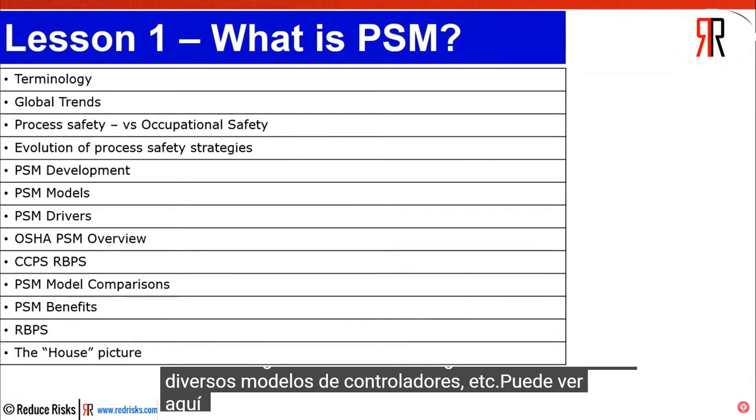In this section, we're going to look at PSM, with an introduction to what is PSM, how it has evolved, and how it all fits together with the various frameworks out there. When we look at what is PSM, there are a few things we've got to go through: some terminology, global trends, the development, the various models, drivers, etc. You can see here the list of things that we're going to go through in this presentation.

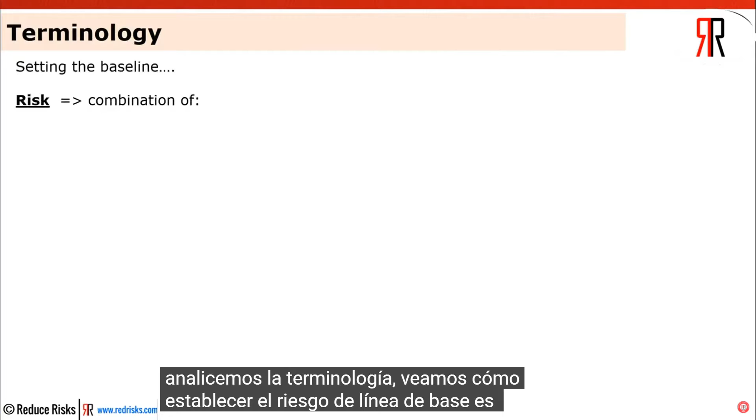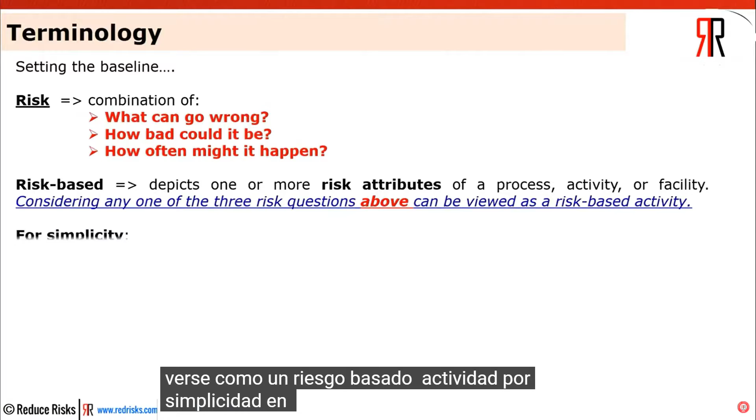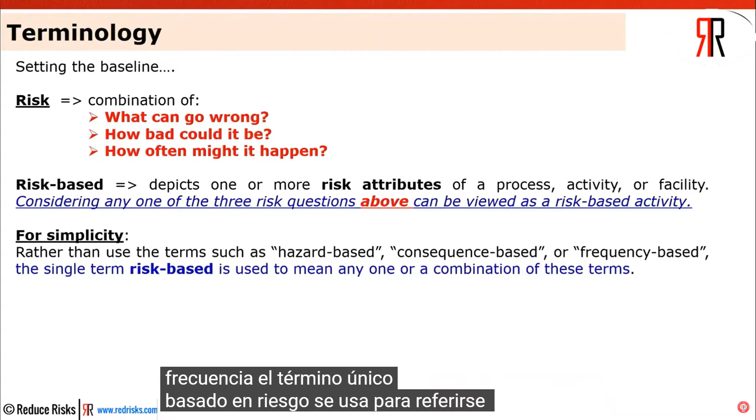When we look at terminology, let's look at setting the baseline. Risk is a combination of what can go wrong, how bad could it be, and how often might it happen. When we look at risk-based, it depicts one or more risk attributes of a process, activity, or facility. Considering any one of the three risk questions above can be viewed as a risk-based activity. For simplicity, rather than use a term such as hazard-based, consequence-based, or frequency-based, the single term risk-based is used to mean any one or a combination of these terms.

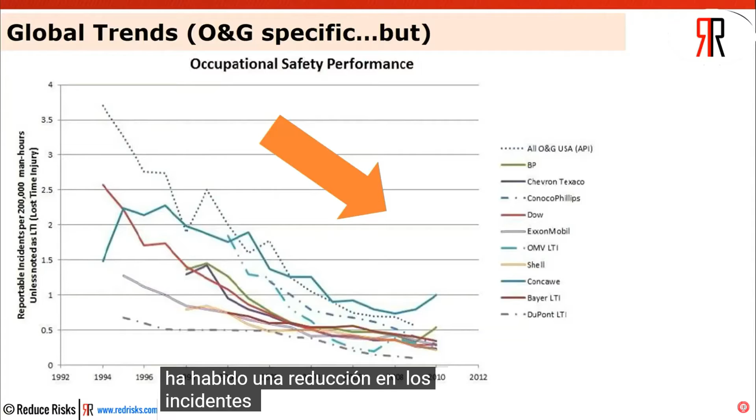Global trends, oil and gas specific, but generally you can say it's the same for other sectors. We know that in terms of occupational safety performance for various oil and gas companies, BP for example, which was my previous employer, we can see that over the years from 1992 to 2010, there has been a reduction in the reportable incidents per productivity or man-hours worked.

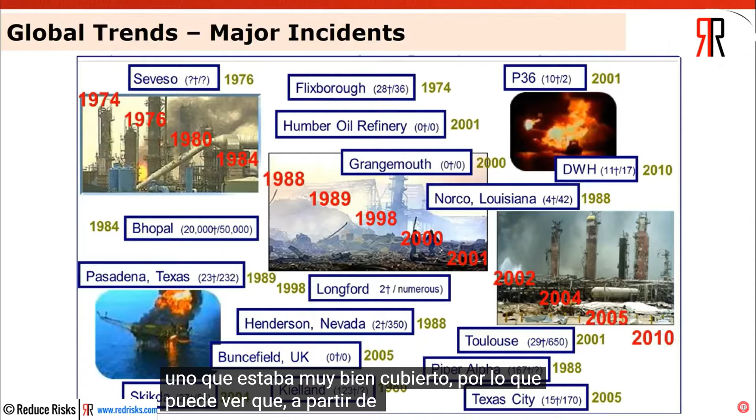Now, global trends in terms of major incidents, again looking at it from 1974 to 2010, some of these are very, very familiar. They had some very high profile exposure, especially in the news. For example, Texas refinery and Flixborough was one that was very well covered. So you can see that from a global trends, we've got incidents that have happened for many, many years.

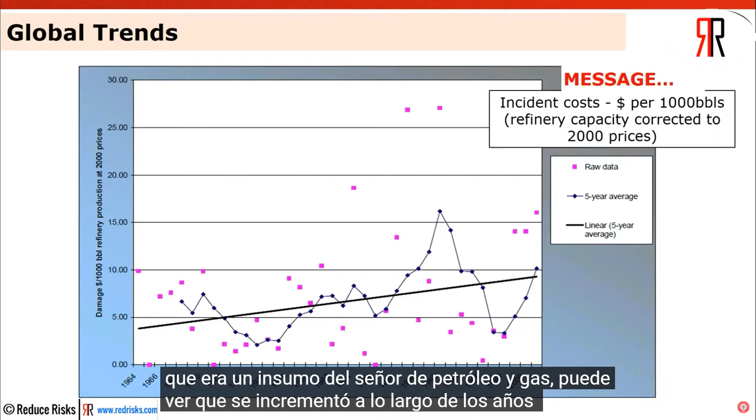Now, not to dwell too long on this particular slide, but as you can see in terms of global trends, the damage in terms of dollars per 1,000 barrels refinery, and I said this was an oil and gas input, you can see it has increased over the years from 1964 to 2000. The message there is it's getting costly.

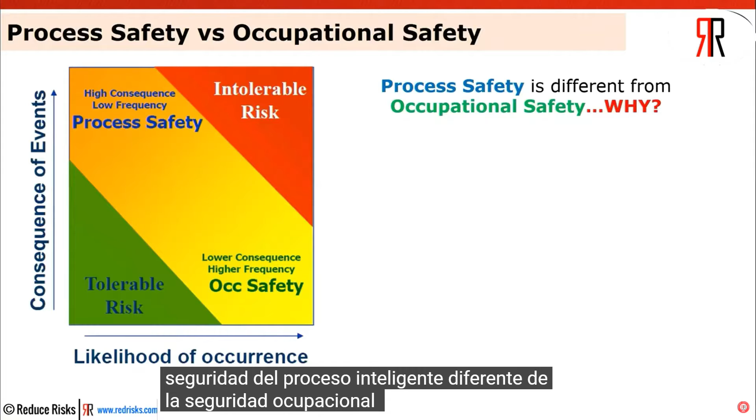So process safety versus occupational safety. What exactly is it? Why is process safety different from occupational safety? Well, process safety is not normal. Most people, not all, lack specific experience, and please don't toast me for this, that's just a general opinion. More robust analyses are required to identify the hazards, being something that can cause harm. And unacceptable consequences need more reliable controls.

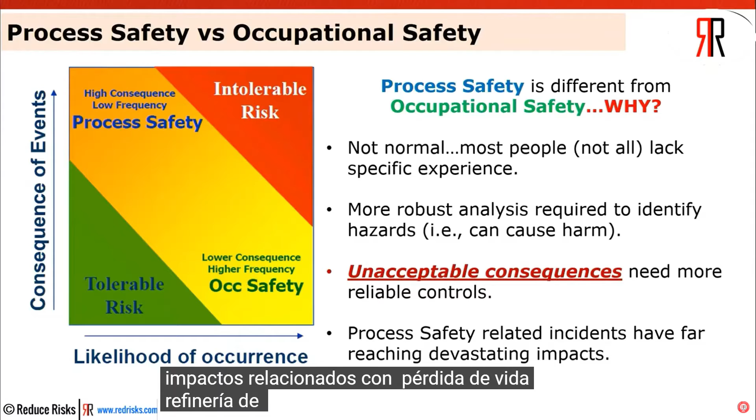But the most important message here is that process safety related incidents have far-reaching, devastating impacts. In the previous slide you saw some of the impacts relative to loss of life, Texas City refinery, Flixborough, etc. They can be significantly damaging to an organization.

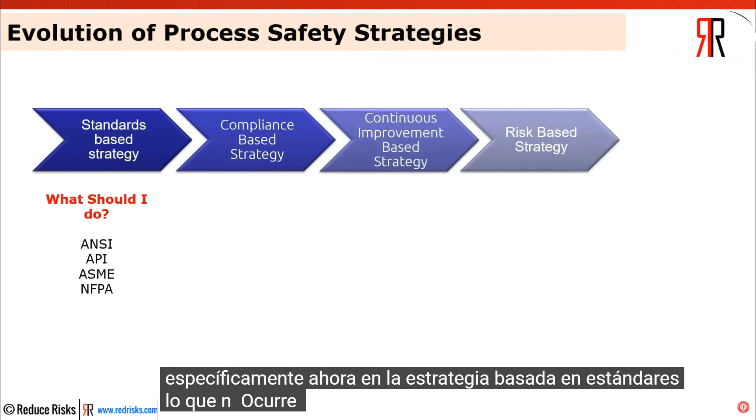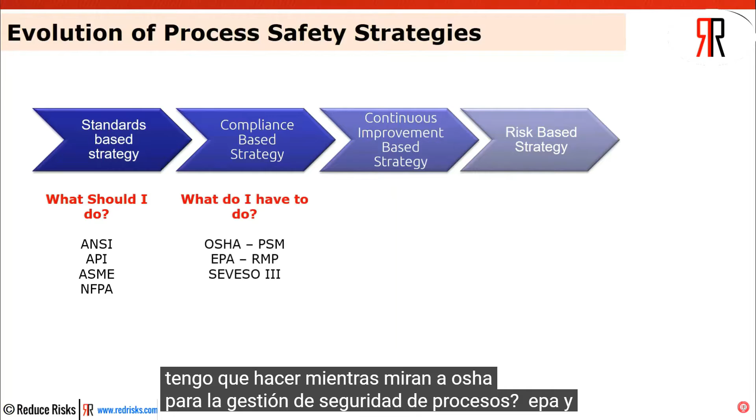Let's look at the evolution of process safety strategies. You can see the slides here go in terms of standard-based strategy, compliance, continuous improvement, and risk-based strategy, which is what we're looking at specifically. Now, in the standards-based strategy, what normally happens and what should I do? You look at ANSI, API, ASME, NFPA, etc. Apologies for the acronyms, but I'm sure most of you are familiar with that. In compliance-based strategy, what do I have to do? Well, you look at OSHA for process safety management, EPA, Seveso III, etc. These are very regulatory driven.

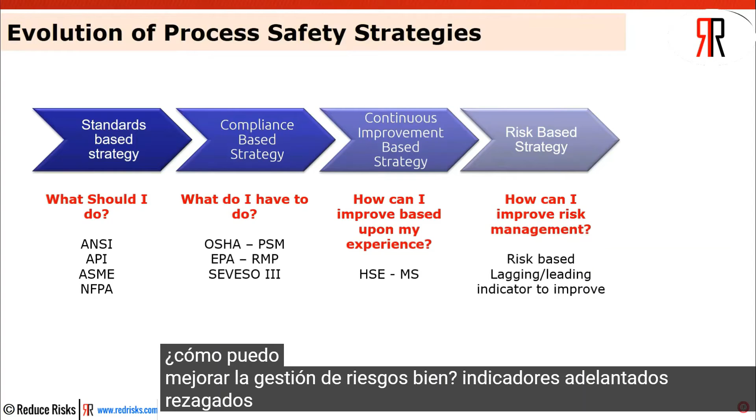Continuous improvement based strategy is how can I improve based upon my experience. Again, many of you will be familiar with the management systems associated with health, safety and environment, specifically OHSAS 18001, ISO 14001, etc. And risk-based strategy: how can I improve risk management? Well, risk-based, lagging, leading indicators to improve.

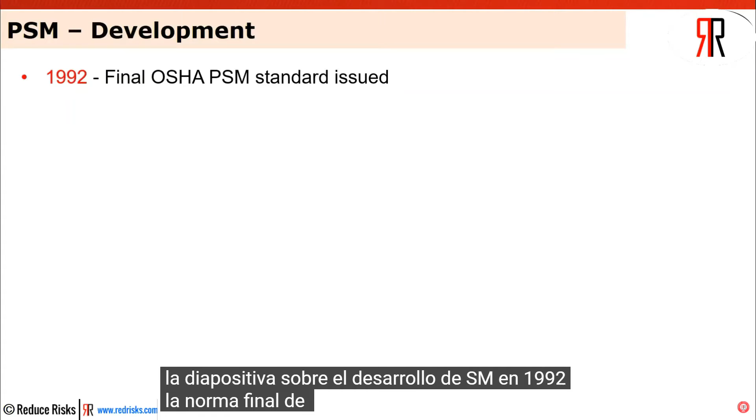Now, a slide on PSM development. In 1992, the final OSHA PSM standard was issued. In 1989, CCPS published their original PSM elements, followed by, in 2007, CCPS publishing the guidelines for risk-based process safety.

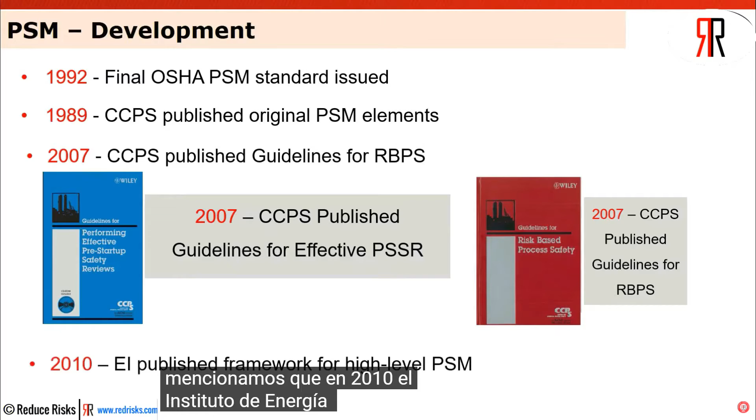And there are two specific documents, the 2007 CCPS published guidelines for effective pre-startup safety reviews and CCPS published guidelines for risk-based process safety. Let's not worry too much about the documents here. We'll be covering all of these and the various elements bit by bit, and also, more importantly, looking at the various components in it, metrics, etc. We must also mention that in 2010, the Energy Institute published the framework for high-level process safety management.

Let's now look at PSM models. We mentioned OSHA and we mentioned CCPS.

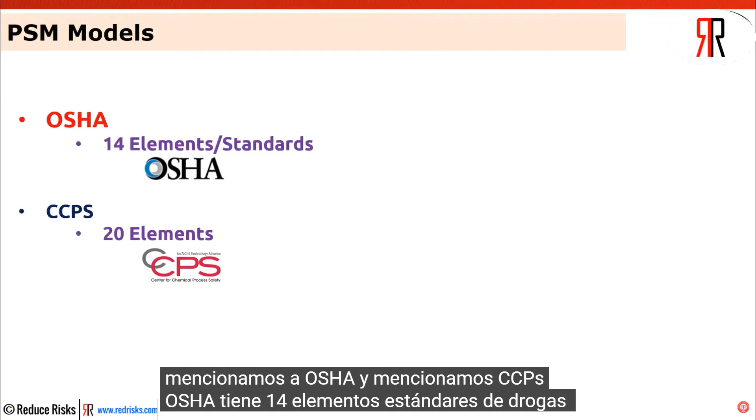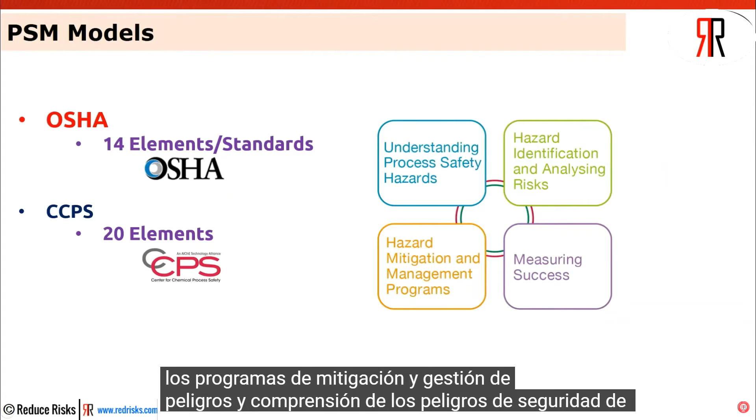OSHA has 14 elements in its standards, and the CCPS risk-based process safety has 20 elements. Fundamentally, they follow this principle of hazard identification, analyzing risks, measuring success, mitigation and management programs on hazards, and understanding process safety hazards. Now, let's look at PSM drivers.

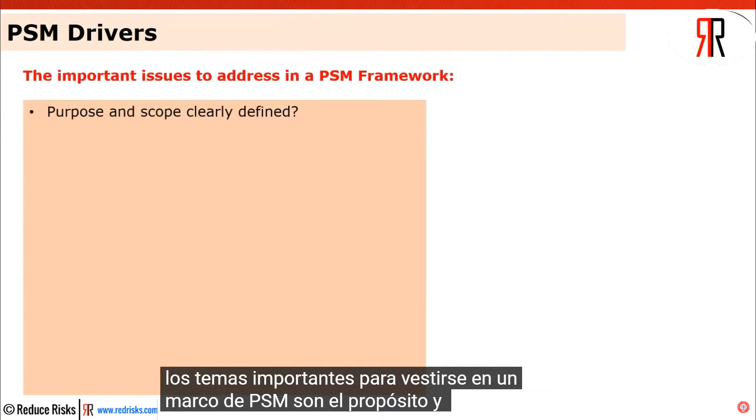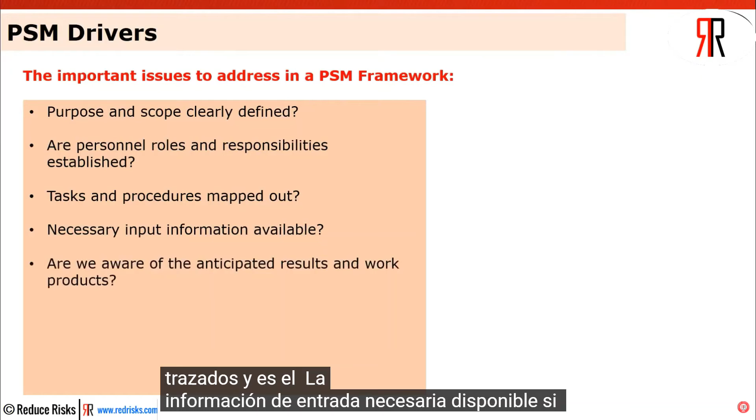The important issues to address in a PSM framework are the purpose and scope. Is it clearly defined? Are personnel roles and responsibilities established? What about tasks and procedures? Are they mapped out? And is the necessary input information available? Are we aware of the anticipated results and work products? Do we know what we're getting into here? And do personnel have appropriate qualifications and training to follow through on the PSM aspirations and framework?

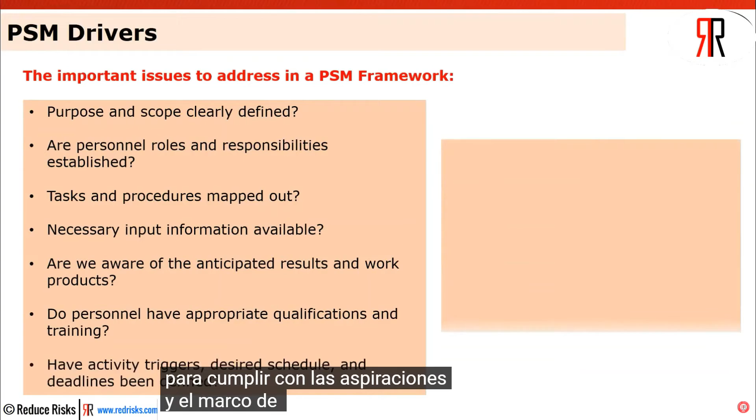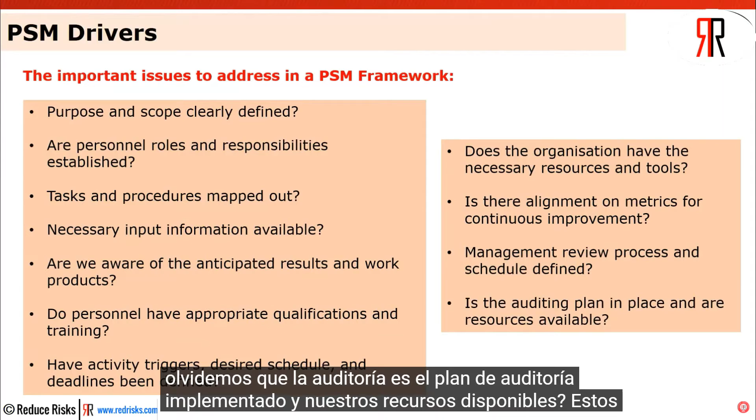Now, does the organization also have the necessary resources and tools? Has there been alignment on metrics for continuous improvement? And what about management review? Is there a process and a schedule defined? And finally, let's not forget auditing. Is the auditing plan in place and are resources available? These are just examples. I'm sure there are more, but these are the main examples for the important issues to address in a PSM framework. What about the OSHA PSM model?

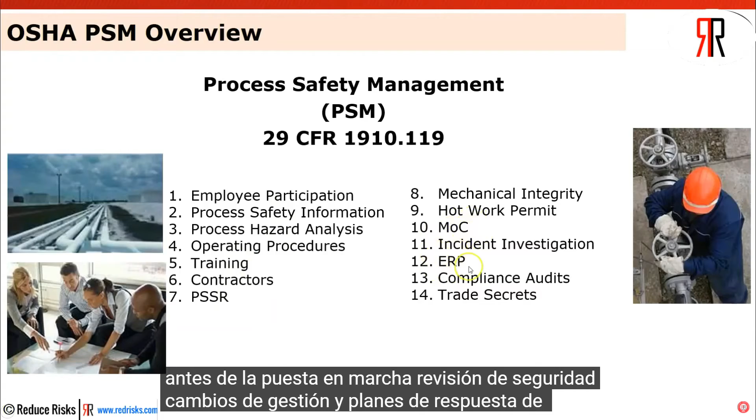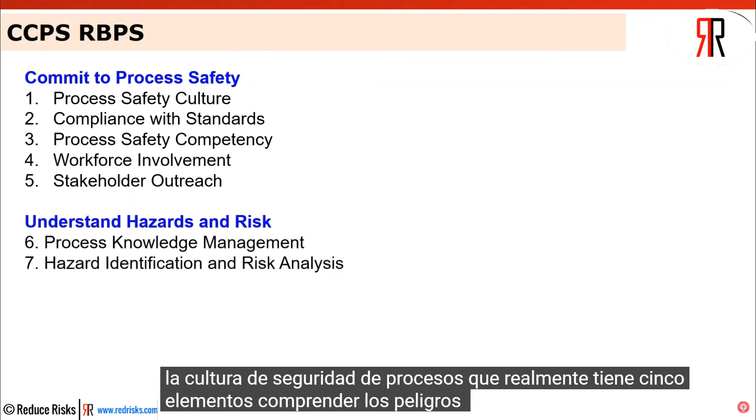CCPS risk-based process safety. There are 4 pieces essentially. Commit to process safety culture, which really has 5 elements. Understanding hazards and risks, 2 key elements. Managing risks, and it goes on to finally learn from experience. There are 20 elements, as mentioned, that all play a pivotal role in the risk-based process safety framework.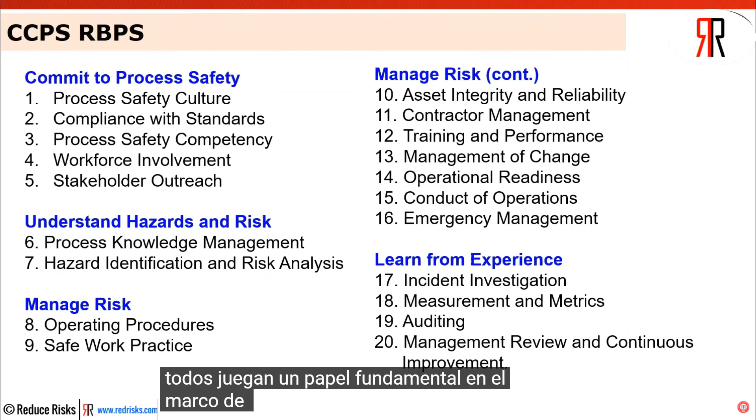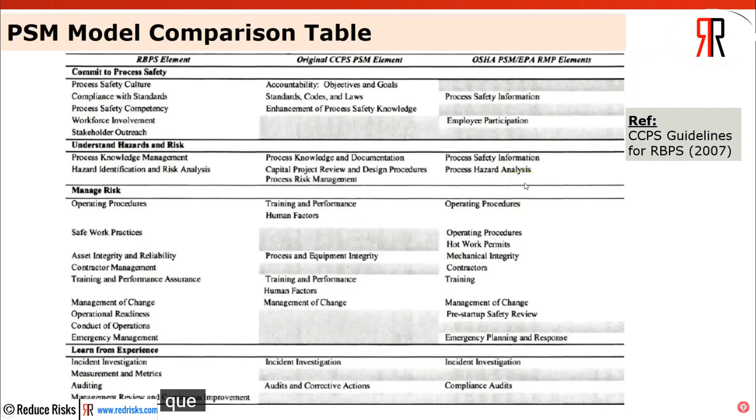The next slide is a little bit busy, and I apologize in advance for that, but this is just to give you a quick overview on a comparison between the various models. Here is the risk-based process safety. This is the original CCPS PSM element and the OSHA framework. You can see they all slot in nicely within those 4 key areas that I mentioned earlier.

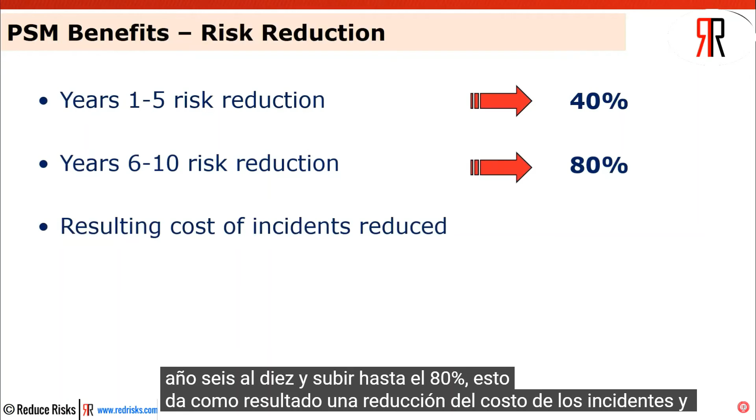From experience, PSM benefits. What does it do in terms of risk reduction? Years 1 to 5, typically I've seen a reduction of 40%. Years 6 to 10 can go up to 80%. This results in cost of incidents reduced and bad publicity being eliminated.

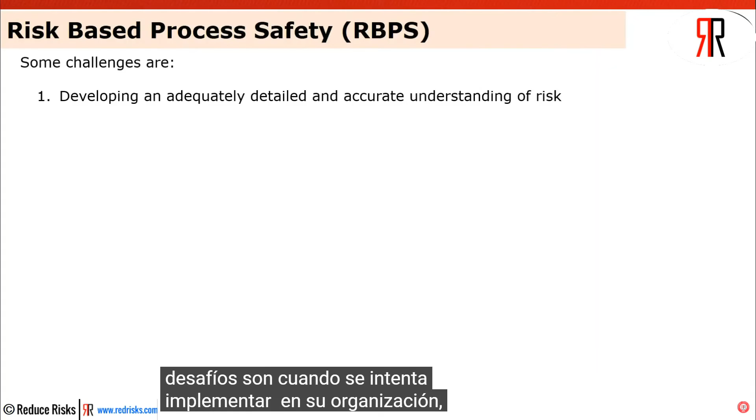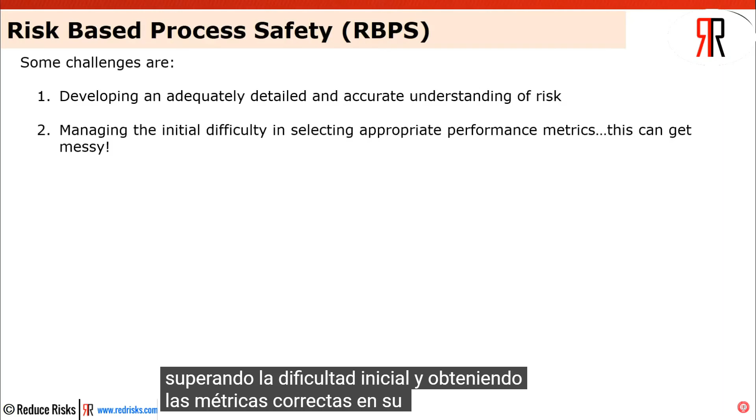So, risk-based process safety. Some of the challenges when you're trying to implement it in your organization are developing an adequately detailed and accurate understanding of risk, getting over the initial difficulty and getting the right metrics in place. As I mentioned, this can get very messy. It can be very confusing, and it can also be a noose around the organization's neck. Acquiring the discipline required to maintain these performance metrics. It's all about continuity and continuous improvement. As I said, progress can only be made if progress is measured.

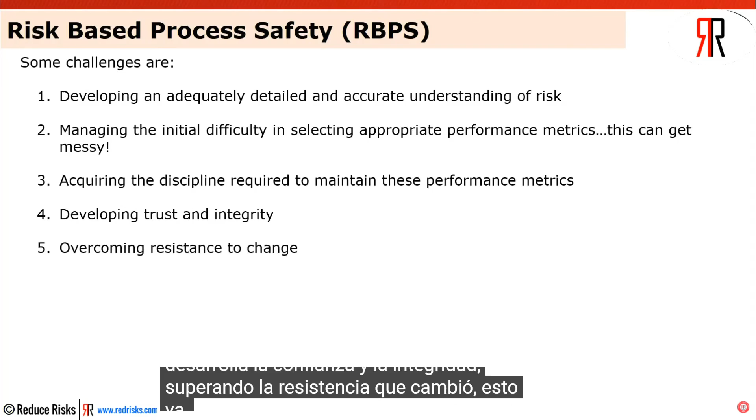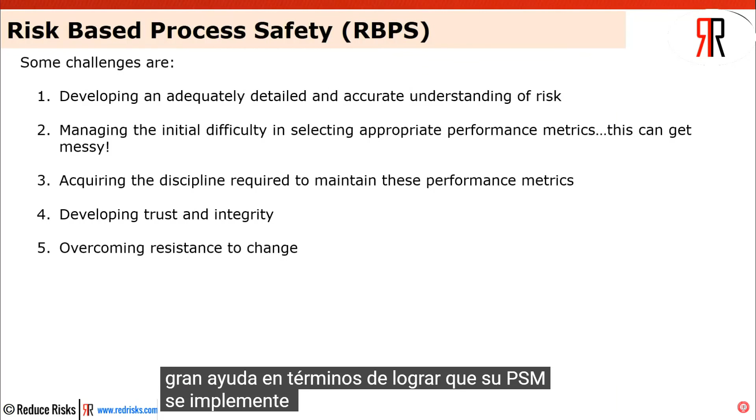And developing trust and integrity. Overcoming resistance to change. This goes to culture, which is a very, very key part. Having the right culture in place and the workforce involvement goes a long way in terms of getting your PSM successfully implemented and really delivering.

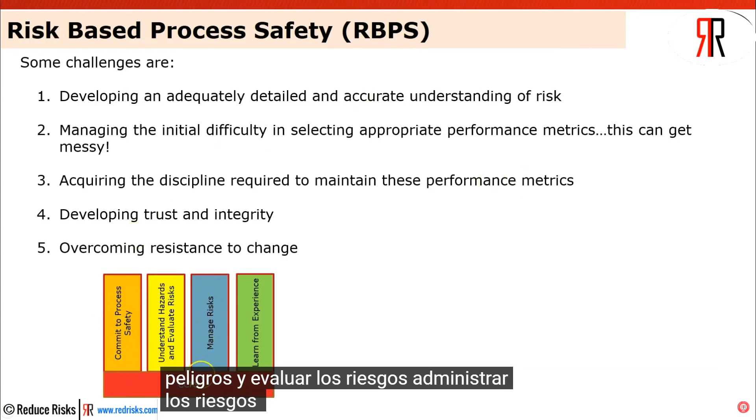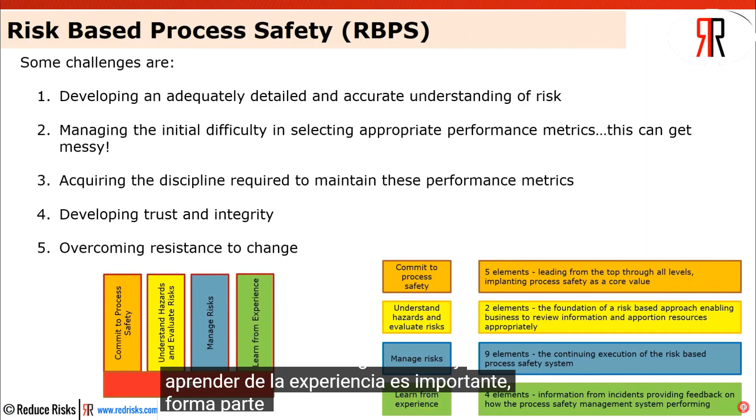Earlier we talked about the 4 key parts of the CCPS framework: commit to process safety, understanding hazards and evaluating risks, managing the risks, and learning from experience. Then I explained that there are various elements in these key pillars. There are 5 elements in the commit to process safety pillar, going to 9 in managing risks. One would say this is the most demanding part, but I would say everything is demanding. It's all relative within your organization. And learning from experience is important. It forms a part of the continuous improvement loop.

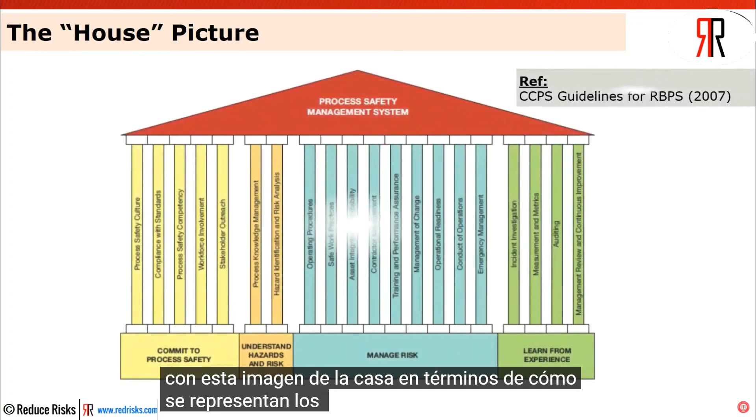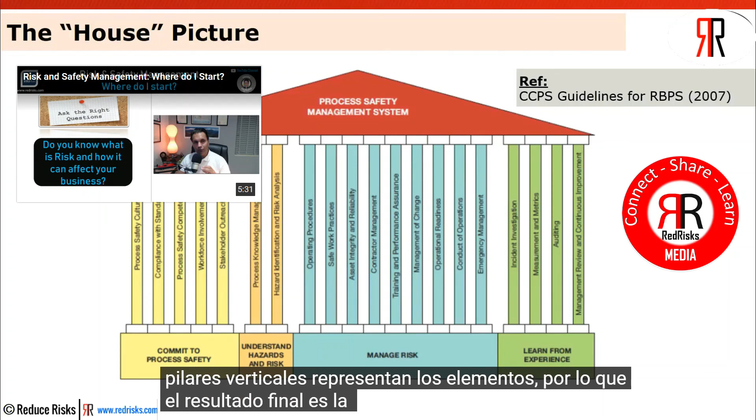And finally, the house picture. Many of you will be familiar with this house picture in terms of how the pillars are depicted forming this house diagram. You can see that at the bottom are the 4 pillars, from commit to process safety through to learn from experience, and how these vertical pillars are representing the elements. So the bottom line is the foundation, and the pillars are there putting the roof in place, which is part of your process safety management.